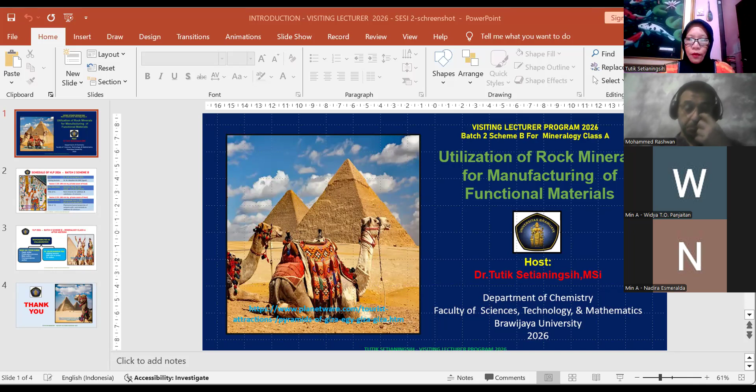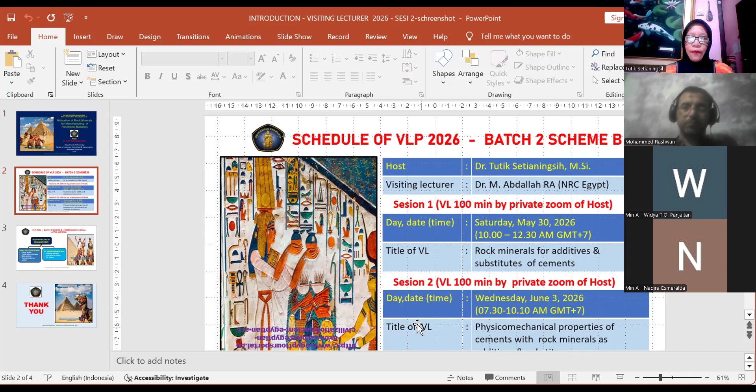Yeah, okay, it is to remind us. This is about the visiting lecturer program 2026 batch 2, scheme B, for mineralogy class A, with the title in my proposal: utilization of rock mineral for manufacturing of functional material. And now we arrive at session 2, Wednesday, 3 June 2026. The visiting lecture is physico-mechanical properties of cement with rock mineral as additive and substitute.

This is to remind us about our responsibility in this collaboration: me as the host, I have the responsibility to prepare the paper for publication and the publication process, and I am the main author and corresponding author. And Dr. Mohammed Abdallah Rashwan Atia has the responsibility to give the visiting lecture for 200 minutes, and also to be co-author in our collaborative publication.

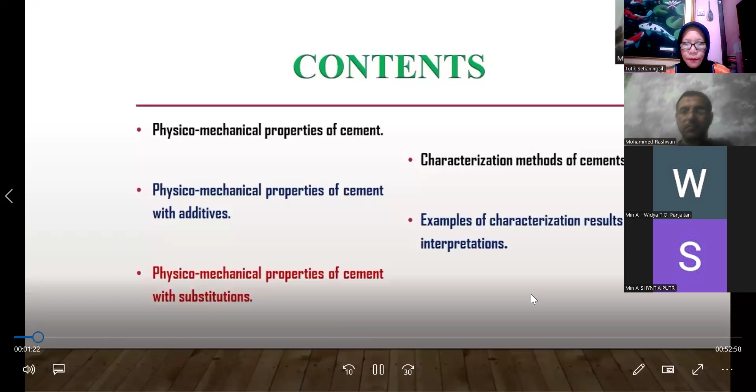First of all, I would like to throw light on some important topics. Hydration of cement. Cement, in its powder nature, doesn't bind the fine and coarse aggregates. So how can it bind the fine or coarse aggregate in concrete, for example? It should react with water. Such reaction is called hydration of cement. The hydration continues as long as favorable conditions are available, like moisture, temperature, which we call curing temperature, and also space or voids that enable the hydration products to be produced, accumulated or precipitated.

Any hydration reaction in chemistry must include three items: input, output, and whether these reactions are endothermic or exothermic. Firstly, the hydration of cement has products which we call hydrates, like CSH, CH, and so on. These products are the skeleton or infrastructure of hardened cement paste, which make the concrete, mortar or paste stiff and hard.

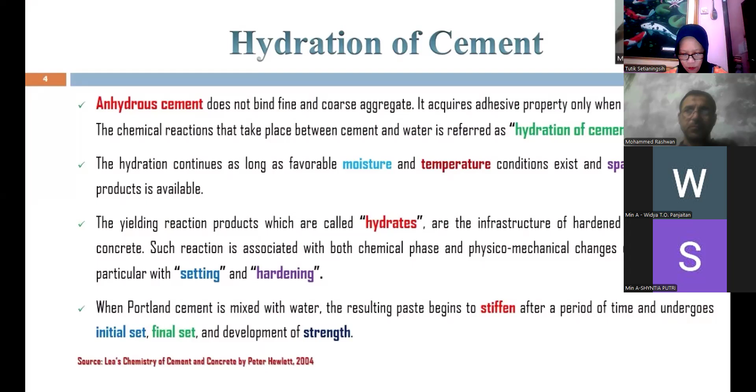The second item of hydration is the heat of hydration. Some reactions in chemistry may be endothermic or exothermic when reacting with water. In case of cement, the reaction of cement with water is an exothermic reaction. What is the meaning of exothermic reaction? It liberates an amount of heat, which we call heat of hydration. The amount of such heat depends on several factors, especially type of cement and amount of major compounds in such cement.

For example, as you know, cement is composed mainly of four major compounds: C2S, C3S, C4AF, and C3A. And each one of these compounds liberates a different amount of heat. For example, C3A liberates the highest amount of heat during hydration, about 516 BTU per lb. BTU means British thermal unit. And the lowest one is C2S, which liberates 98 BTU per lb, per pound.

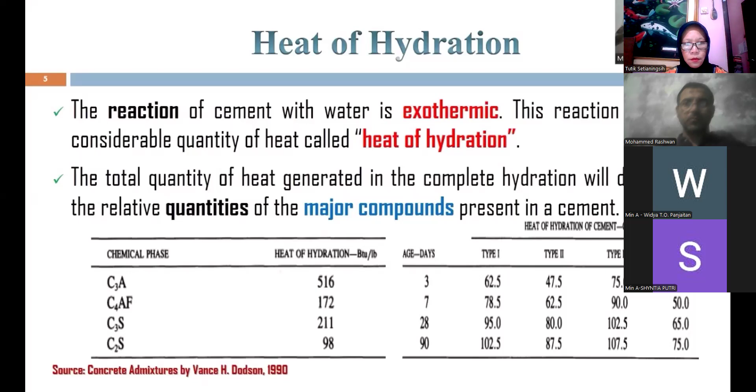The rate of reaction in chemistry may be finished instantaneously, in an immediate time, or may take a long time or forever. In the hydration of cement, the reaction of cement with water in the early age would be faster, and the rate of hydration decreases with time. Several factors affect the rate of hydration, such as the phase composition of cement. For example, C3A reacts with water instantaneously, faster than the other phases. As you can see in this figure, C3A in blue reacts faster than the other components.

The second factor affecting the rate of hydration is the fineness of cement. The more fineness of particles, meaning the higher surface area of cement, the higher the rate of hydration in contact with water. For example, type 3 cement means rapid hardening Portland cement. Why do we call it rapid hardening? Because of its high fineness, high surface area, and such fineness also has a great effect on strength gain. This table shows the influence of cement fineness on strength gain with time. You can see that with increasing fineness of cement, the strength gain increases. Third factor, the water-cement ratio. The increase in water-cement ratio will increase the degree of hydration, especially at early age.

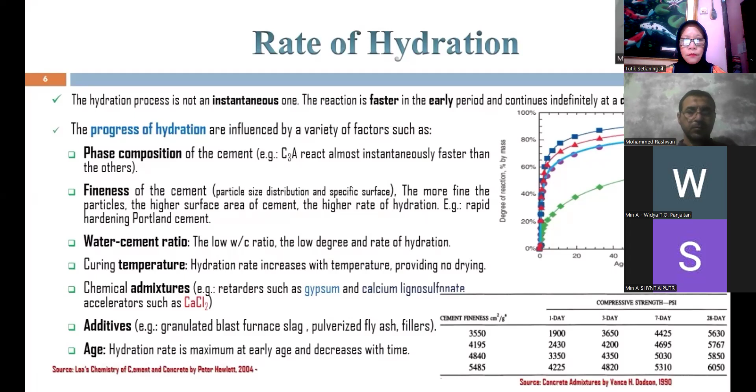Some additives like blast furnace slag, fly ash, fillers, any type of pozzolana, calcined pozzolana, natural pozzolana, rock materials, any other type of additives can affect the amount or the rate of hydration. Age or time. You know, the hydration rate is maximum at early age, and as the process proceeds in time, the rate of hydration decreases.

A reaction may be divided into several periods. The reaction of cement with water is divided into three periods, and these three periods are related to engineering practice. The first one is the workability period. Workability period means, in practice, wetting and mixing the concrete, transporting, agitating, placing, and finally finishing the concrete mix. All of these must take place in this period, which may take from 1 to 3 hours.

The second period is a setting period. In the setting period, the cement starts to thicken, or the hydration starts to be slow. And this reaction is the accelerating period. Accelerating period, what does accelerating period mean? It takes more time, from 10 to 20 hours.

During this period, the curing of concrete: as you know, after molding, the concrete or the steel product must be cured for complete hydration and for development of the strength. During this period, the concrete is cured, and it can be extended to the next period, which is called the hardening period.

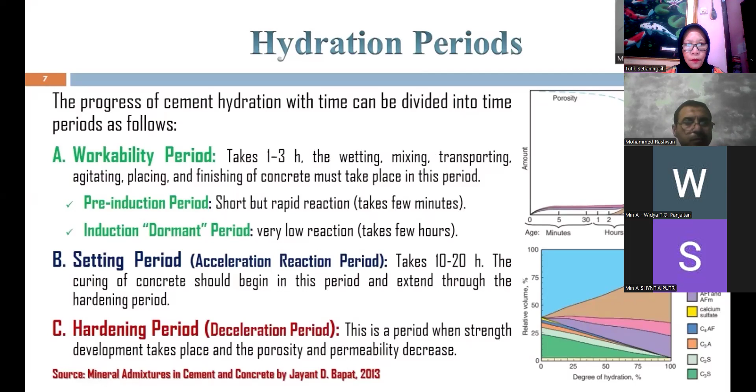The strength development means the decrease in porosity, meaning increase in durability, meaning increase in bulk density or density, meaning decrease in porosity, decrease in water absorption of such a product. Hydration products. The reaction must finally liberate heat and liberate end products.

C3S, tricalcium silicate: 2 moles of tricalcium silicate react with 6 moles of water and produce 3 moles of calcium silicate hydrate, or CSH, plus 3 moles of calcium hydroxide. 2 moles of dicalcium silicate will react with 4 moles of water and produce 3 moles of calcium silicate hydrate also, plus 1 mole of calcium hydroxide.

The difference between these two phases is the amount of portlandite, or calcium hydroxide. The amount of portlandite liberated from the reaction of tricalcium silicate with water is triple the amount of calcium hydroxide or portlandite liberated from the reaction of dicalcium silicate with water. CSH in total makes up about 50 to 60% of the volume of the solids in the complete hydration of cement.

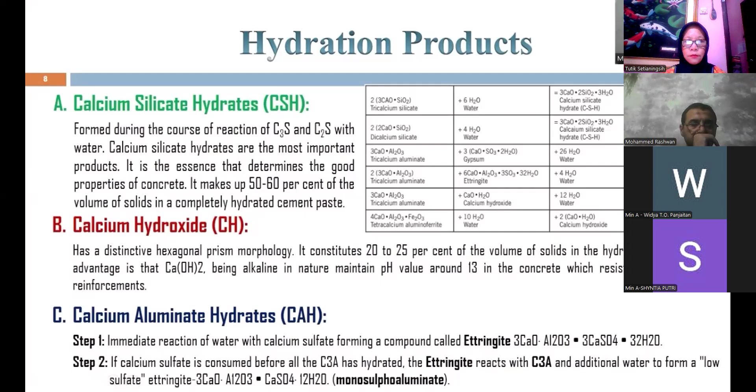Physical mechanical properties. After cement hardening, or the produced cement in the factory must be characterized. The characterization of cement may be chemical, physical, and mechanical characterization. The specifications for cement set limits for all these requirements: limits for chemical requirements, limits for physical and mechanical requirements. Such requirements may be helpful in interpreting the result of cement tests.

Cement specifications, or the limits of cement specifications, depend on the type of cement. As you know from the first lecture, there are several types of cement according to chemical composition or according to performance. During the manufacture of cement, the chemical composition and other physical properties must be monitored periodically. Because with any variation, any deviation in the chemical composition or physical properties, the performance of such cement will not achieve

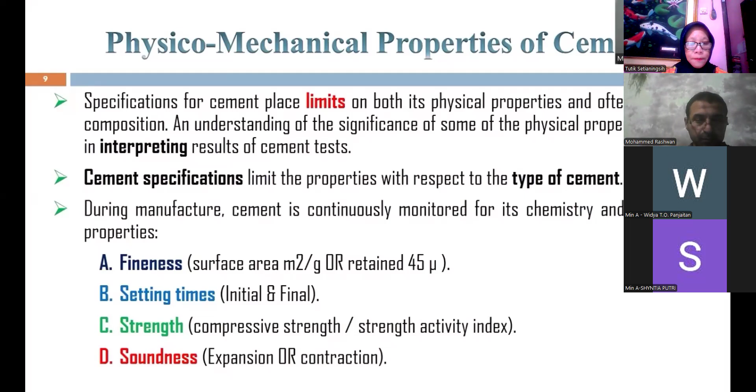Property number 4 is soundness. Soundness means expansion or contraction: whether the cement retains its shape after hydration or shrinks or expands after hydration with water. Some properties are related to the chemical composition; we will not speak about them because we threw light on the chemical composition of different types of cement in the first lecture, and in this lecture we will talk about some physical properties of different cements.

For Portland cement, according to ASTM C150, the fineness by specific surface area for all types of cement must be minimum 260 square meters per kilogram. The soundness, the expansion of all these types of cement, must not exceed 0.8%. Expansion is an indication of the soundness of cement. The other property, compressive strength by mortar cubes. The compressive strength for different types of cement varies according to the composition, from 1 day to 28 days.

Setting times, whether initial or final. Initial setting time must be not less than 45 minutes, and final setting time must be not more than 375 minutes. The initial setting time is a very important parameter because it enables mixing, transporting, placing, and agitating the concrete. So this time must not be less than such number. Also, the final setting value.

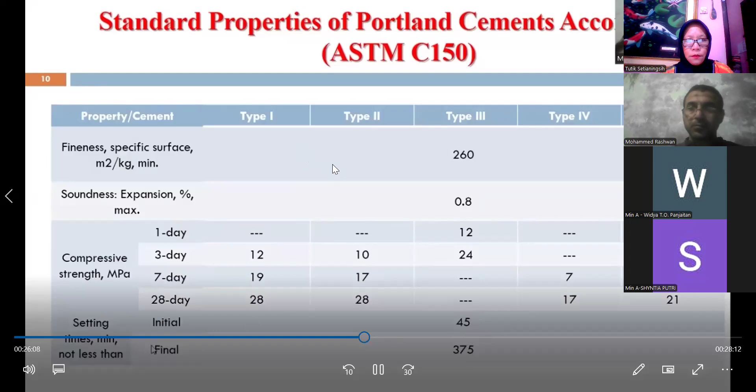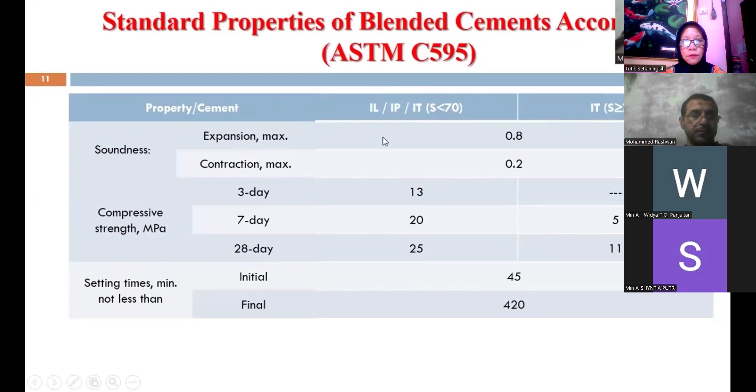Other products: blended cement. Blended cement is Portland cement mixed with different types of additive or substitution material, like IL, meaning limestone additives, IP pozzolanic additives, IT ternary additives. Ternary additives like limestone, Portland, and slag. For all these types of cement, the properties vary, especially compressive strength. For soundness and setting time, I think the values are fixed. Expansion, the expansion...